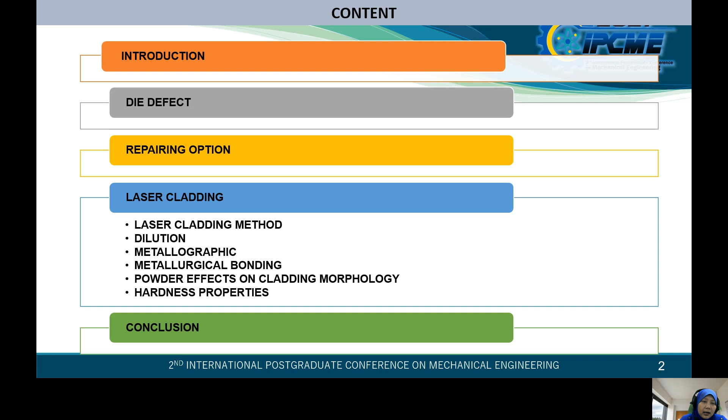Today I want to present laser cladding process to enhance surface properties of hot press forming die. To start, let me brief about the content of this presentation. First, introduction, then die defect, repairing option, laser cladding, and last, conclusion.

Technology of metal forming rapidly developed in recent years. It became one of the most important technologies in the tooling industry. In metal forming, blank material is deformed to take the shape of the die geometry. Now it is recognized as a top technology in the automotive manufacturing sector. It produces ultra-high strength components of automobile structure with strength up to 1500 megapascal as shown in figure.

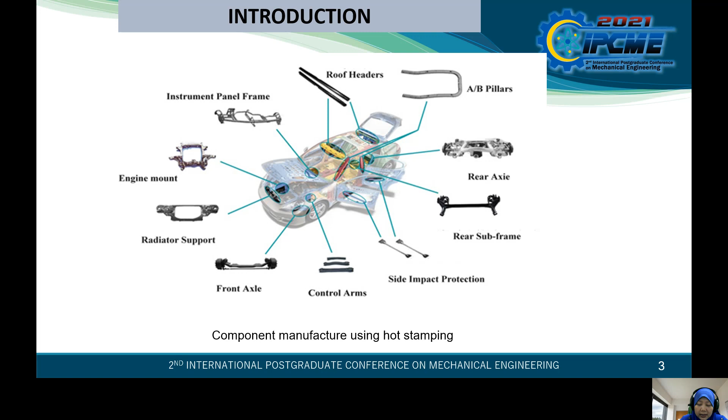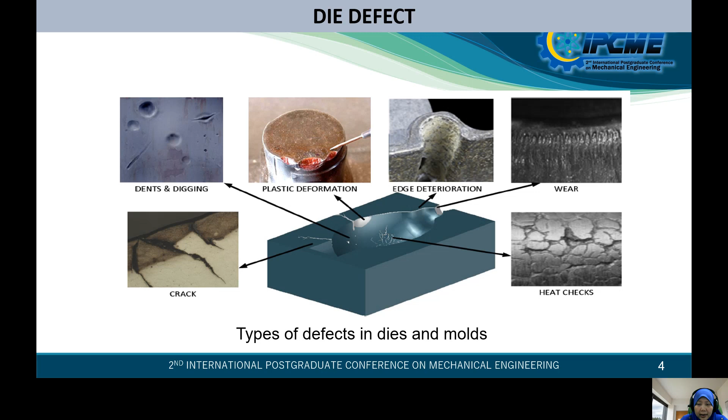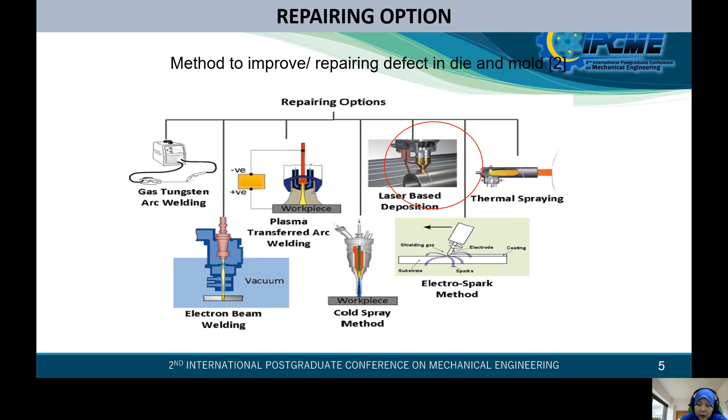Die wear and failure significantly affect the service life of die, resulting in the need for a new die, which is usually expensive and an unexpected high production cost. Figure shows option methods to improve or repair defects in die and mold. The methods are gas tungsten arc welding, electron beam welding, plasma transferred arc welding, cold spray method, laser based deposition, electro spark method, and thermal spraying. But this topic just focuses on the laser based deposition method. The laser technique is laser cladding.

One of the techniques to modify or improve surface properties in advanced manufacturing is the laser cladding process. The advantages of implementing laser cladding are improved grain size, increased hardness, minimal dilution, and new surface properties. Laser cladding uses a laser heat source to produce the desired clad layer during laser processing.

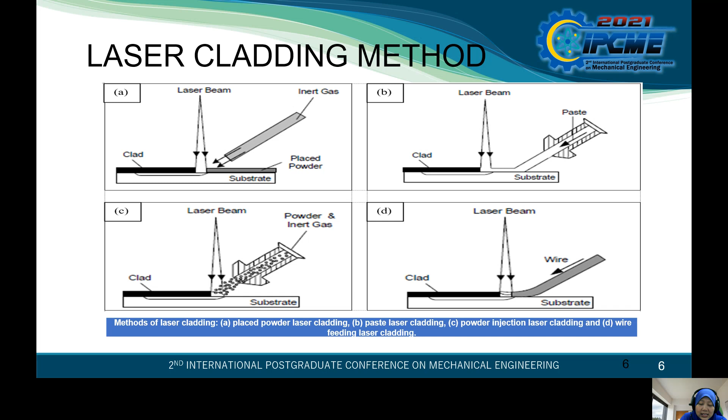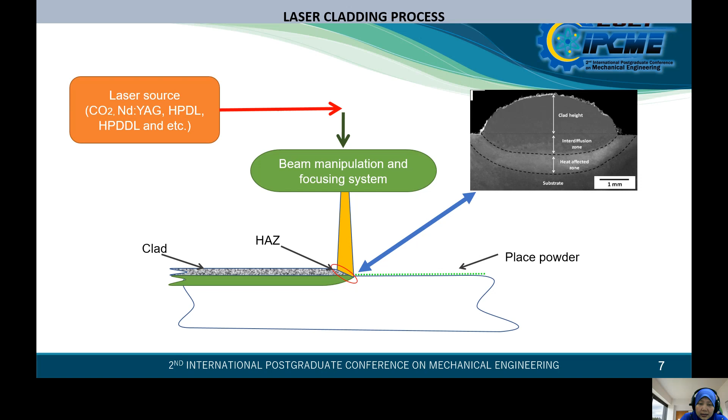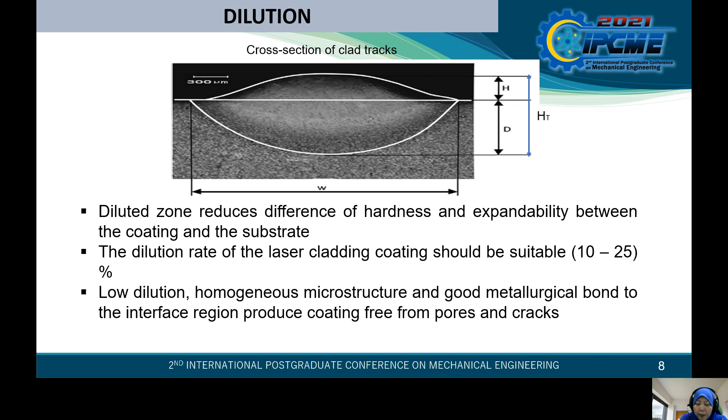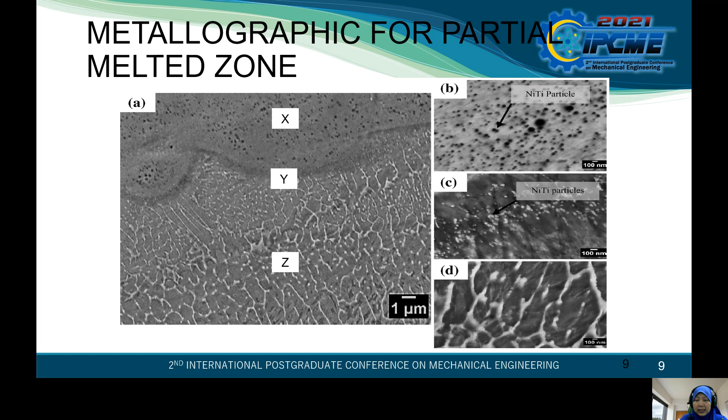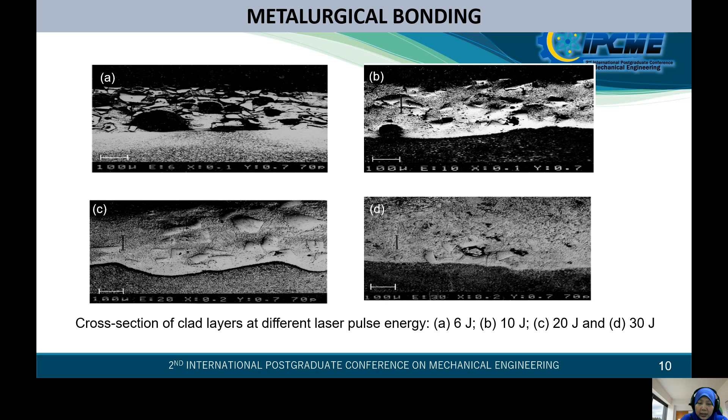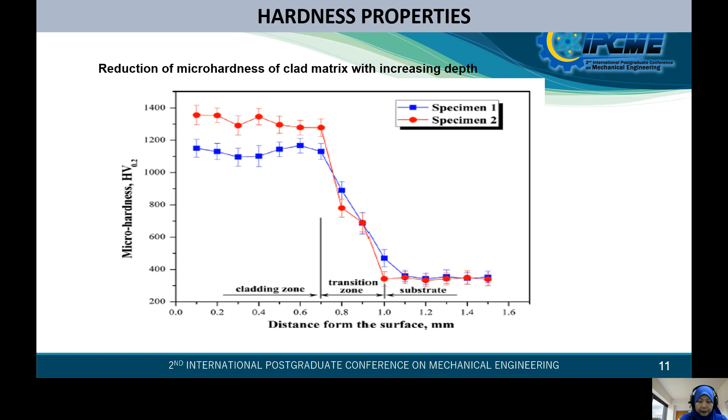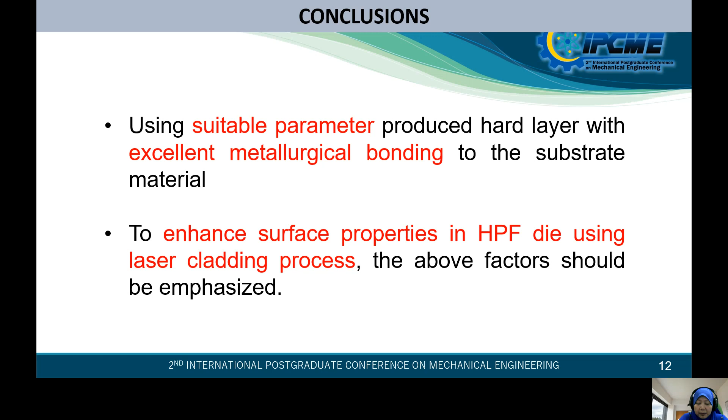And the conclusion, using suitable parameters produces a hard layer with excellent metallurgical bonding to the substrate material and uniform composition and preferable coating thickness. To enhance surface integrity of the material, the above factors should be emphasized.